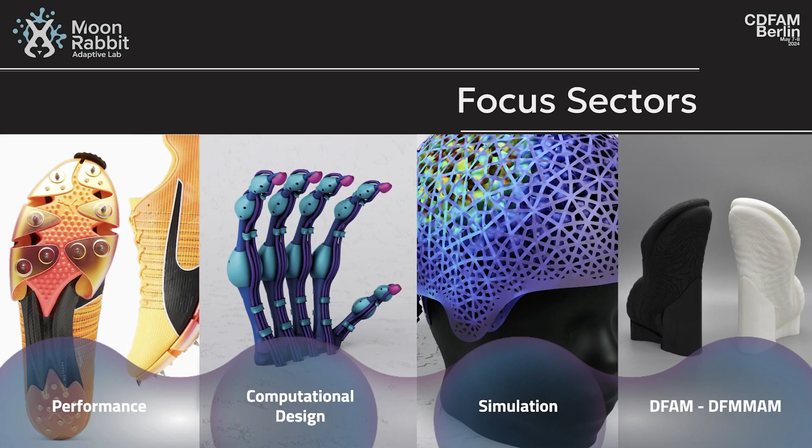We assist companies in crafting their unique recipes of solutions to enhance, modernize, and integrate new technologies into the daily design process. We have four focus sectors.

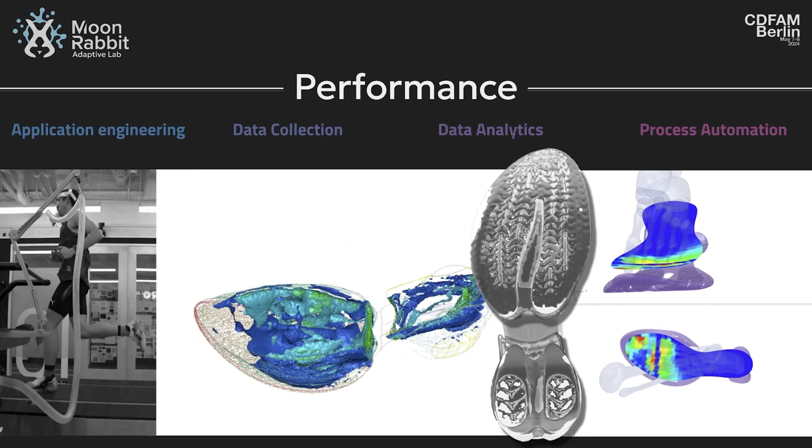Performance product design: here we are focusing on creating the correct KPIs of your designs or processes. We go from data collection, data analytics, we create process automatization, we see how we can apply our skills, our engineering, our knowledge in your products. We pride ourselves on product performance - everything about achieving a target, a specific characteristic, a specific material, specific KPIs. That's the focus of this design part.

Computational design process - this is the part that for us is creative problem solving. We create parametric solutions, custom solutions, or generative solutions based on the creativity of our designers, the creativity of the workflows we are creating, and also the creativity of how we utilize technology, mathematical formulas, and so on to inform our design. We are really proud of this part.

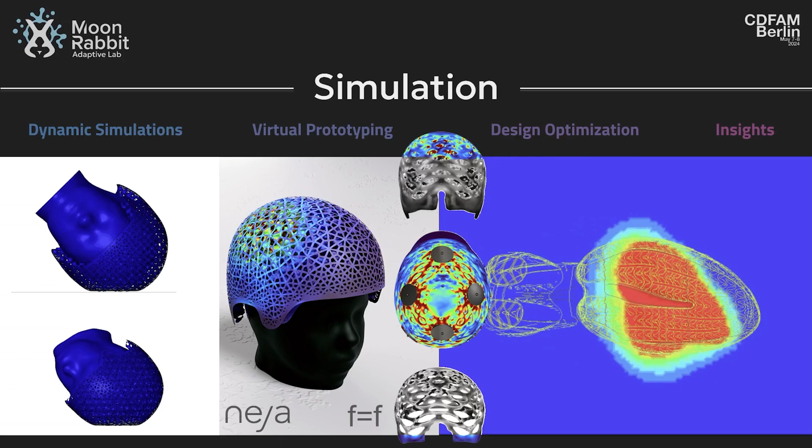We are focusing on creating strong knowledge in simulations, either digital implicit simulation or explicit simulations. We try to focus on creating the best possible material setup and settings in order to help companies create virtual optimization, virtual prototyping, to generate the best insights possible.

Finally, all these areas are converging in design for additive manufacturing, because we know the sector is evolving. This evolution will also be an evolution in terms of manufacturing, and something we believe will be great and will increase is the part of additive manufacturing.

Well, after saying all this, why design systems? Design is rapidly evolving, becoming more complex. We need to see it from a different approach in order to solve the problems of today. This starts to engage different kinds of collaborations - we need to create cross-functional teams in order to create a more complex solution, because complex problems require complex solutions.

If we have different minds with different perspectives, that's the best way to approach it. Computational design is also good at this - it helps us create computational thinking, which helps in breaking down systems into manageable parts and then discretizing into algorithms to enhance efficiency, create scalability and adaptability. That's why we like to solve these kinds of problems.

That's why we are bringing today two study cases of two collaborations created over the last 2 to 3 years. The first is an ETH collaboration with Thomas Buchner, a PhD candidate at ETH Zurich, in which the objective was to create a soft robotic hand using Inkbit technology with vision control. The objective was to produce something similar to a human hand, to show that it's possible with multi-material 3D printing to achieve something as functional and complex as a human hand.

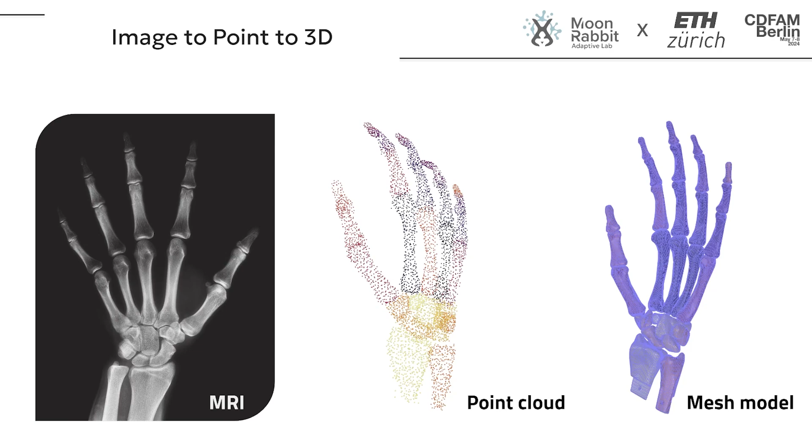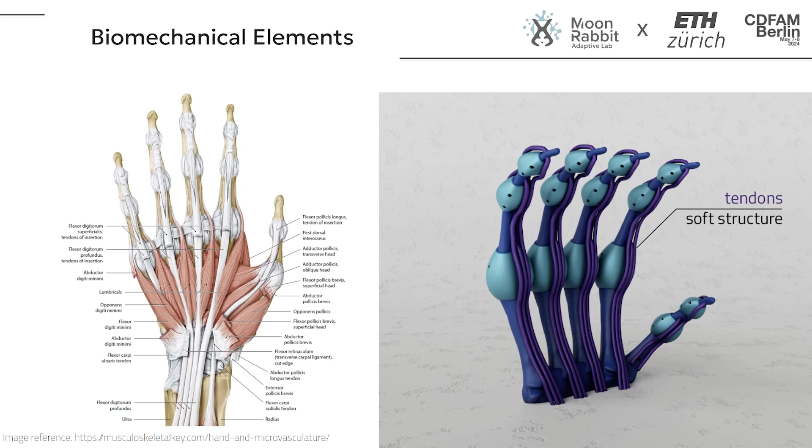We started from the image point, we created the mesh model, and once we have this initial mesh model, we needed to start identifying the characteristics of the human hand. We needed to understand the ligaments, the bones, how the bones are bending, if they're flat bending, the tendons, the pulleys, everything that could be used to create a functional element.

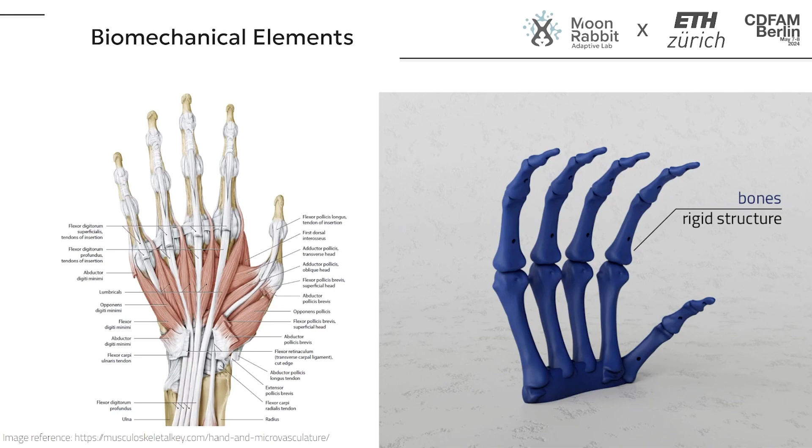Once we identified all of these elements that are actually there, we chose 5 of them and tried to create an intricate model with all of them. We also needed to consider the manufacturing part, so we asked Inkbit, and they told us what to do, what not to do, how to create the interfaces between the soft and the rigid, how they do the gradient materials, how they need to blend together.

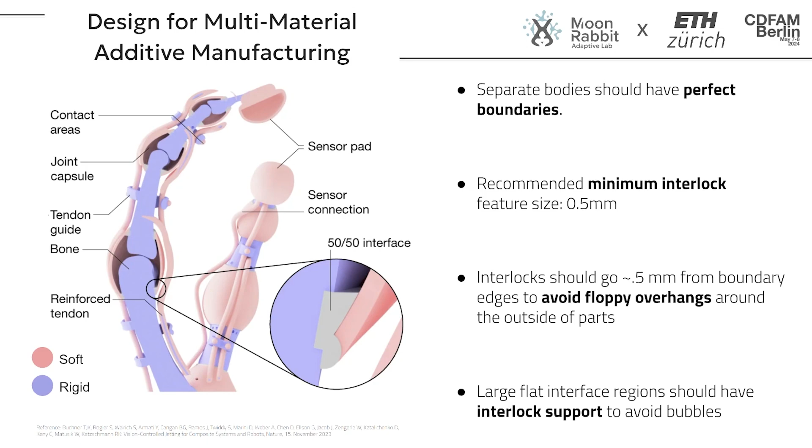Remember, this is a human hand model, so the scale was small. We needed to follow all this functionality at human hand scale with this material, with minimum design requirements, and we needed to create the best of it.

So how do we approach the challenge? The first part was creating a 3D model. We started with a traditional approach: we took Rhino, placed our bones, and started creating on top of that. What was the problem with doing something like this?

Basically, once we finished the first finger, because we needed to check if it was possible to create something this complex, we understood that maybe we needed to move the pulley a little, maybe change the belly, change something. And this change was affecting something else. So at the end we created different options, and we saw that if we needed to change something, something else was moving. It was impossible to follow up all these design changes in a fast way, because of course the timeline was tight.

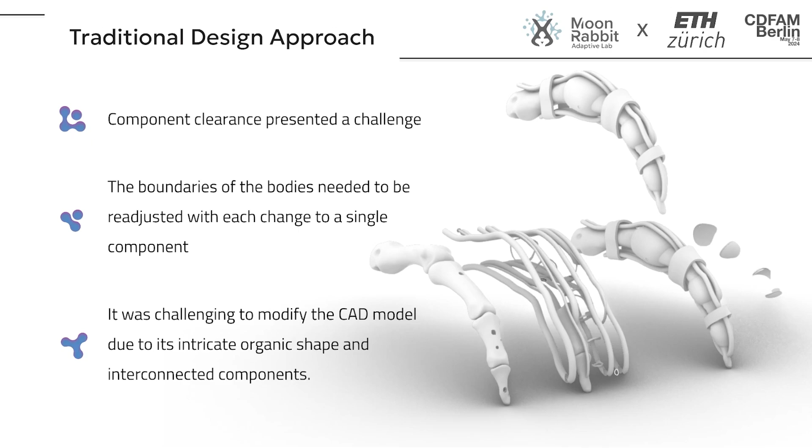So we said, okay, let's remove everything and start from scratch. Let's identify what's the minimum characteristic element that can actually inform our design. We understood that the capsule was the element that was ruling all of them.

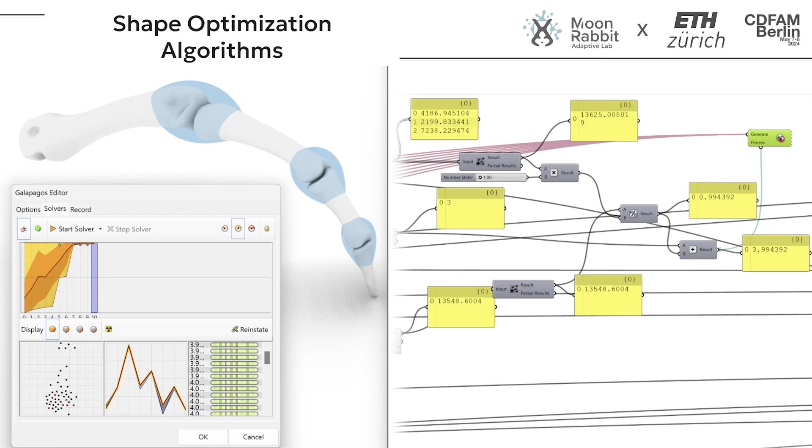Once we identified this one, we created a shape optimization algorithm in order to create the best fitting of the pulley, because we wanted to minimize the volume but didn't want any clash between the components. So doing this, the best way was to create a shape optimization algorithm. We created the pulley and so on.

After that, we started building on top of this element, because by building on top of the element, we knew we were able to parameterize the thickness between the soft and the rigid, between the pulley, between the tendons, between all the ligaments. In this way, we have a more complex design based on a single structure.

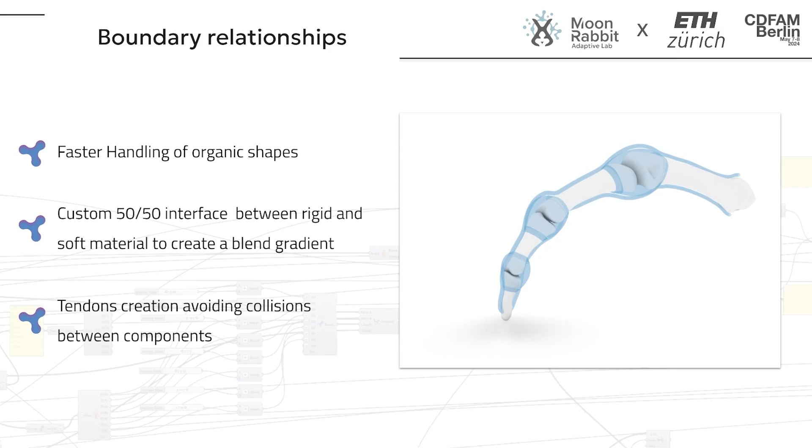So what we did was identify that single structure, and then create the model on top of this. After 8 iterations, we reached the final result in which we have a model complex enough to create, modify, and so on, and then you have some adaptability, so it can be adaptable.

We need to rerun some parts, but of course there are some manual processes like the draining holes, the sensor pads and so on. But at the end, the base model was created in a parametric way using these tools.

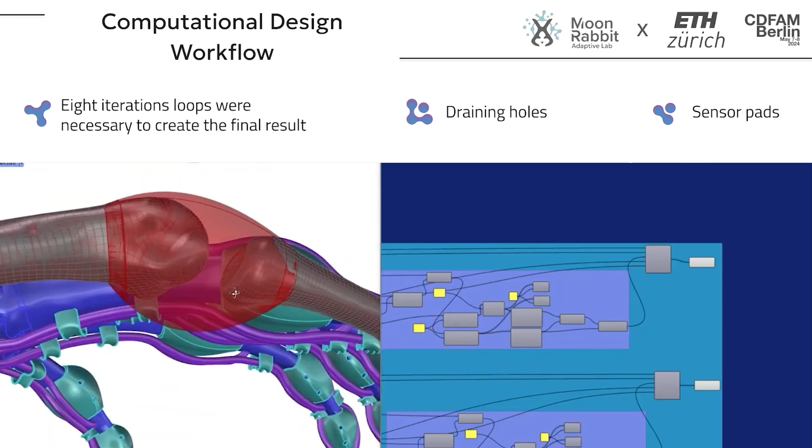After this, I decided, what if computational design was today? So I took this challenge a little further and created a simulation with all these multi-material setups. I wanted to highlight that from 2013 to 2024, it's changed a lot in the computational field. Now, for example, we have the meshless simulations by Intact Solutions, in which we can have multi-materials with faster iterations, and this helps us create informed designs.

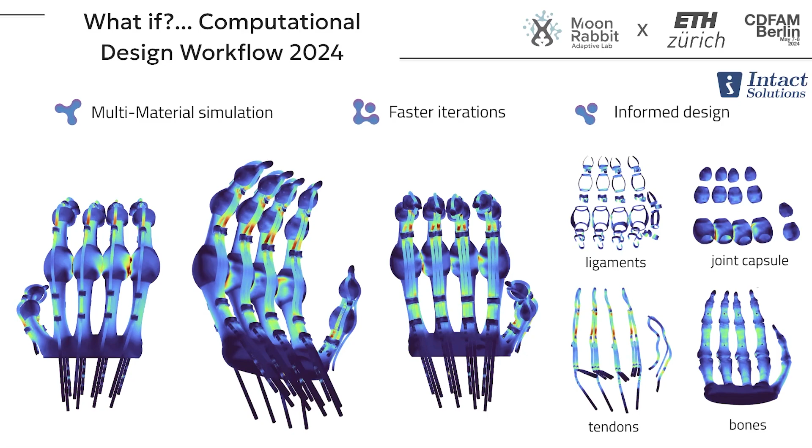So we know that maybe something is going to fail, something is not going to be correct, the ligaments are not well designed, and so on. So we can improve our designs, improve our boundaries, improve the resistance, and use it to create better informed decisions.

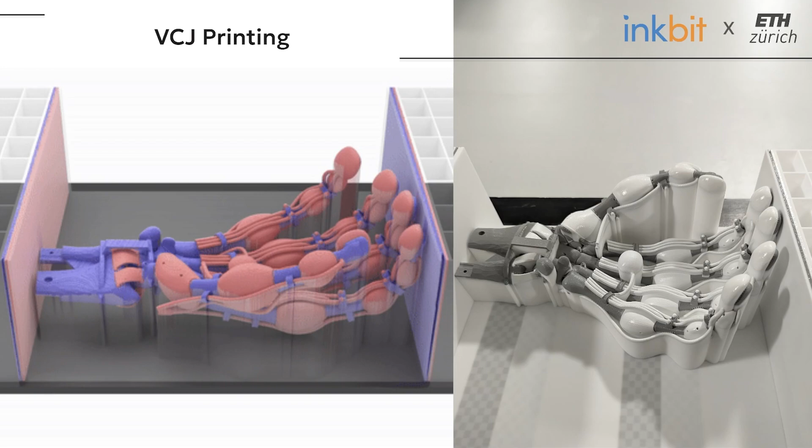This is how it looks. VCJ printing is actually a BMP, a PNG, or like a bitmap image in which you have grading colors in grayscale, so you can select the different materials and so on. And this is the final result, in which we can actually see the soft robotic hand moving.

And after adding on the mechatronic parallel actuators, that was included by two of us.

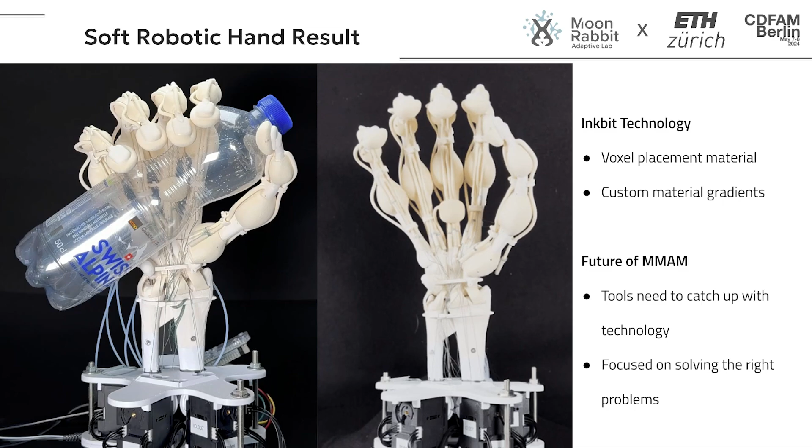Our second case study is about performance product design, because what could be best in terms of performance, as a sprint spike, of course. This is a project collaboration with Puma Innovation, with the Puma Nitro Lab team, Carsten Wolfram, and Coach Liv. So what we did here was take the challenge of how we can get a performance footwear product using computational design, computational workflows.

So we need to understand what the computational simulation has, what's the biomechanical information, what are the materials necessary to create all of these environments and push it into a product that can be informed using these new tools. In order to do that, we need to create a workflow.

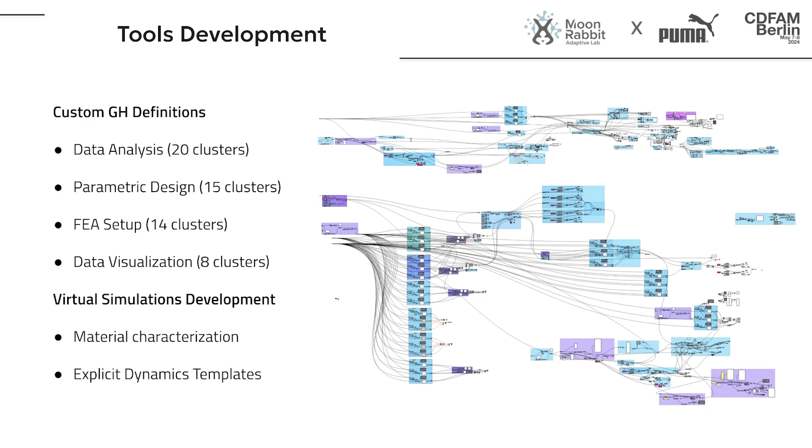We create specific tools, for example, to create data analysis, parametric design definitions, finite element setups, and data visualizations. We use all of this to create templates. Once we identify the minimum requirement, we create templates, the characteristic elements that we can reuse to analyze several data.

This data needs to come from somewhere, so we started creating experimental data collection provided by the Puma Innovation team. We analyzed how Karsten moves, created data discretization and segmentation, and different visuals of this data to understand what was moving and where. This enabled us to create...

Once we created this, we also need to understand what materials are involved in this environment - the upper, the carbon plate, the midsole, the power plate, and the spikes. We also have the track, which is a hyperelastic material, so we create the characterization of this material and try to put everything together inside a virtual environment.

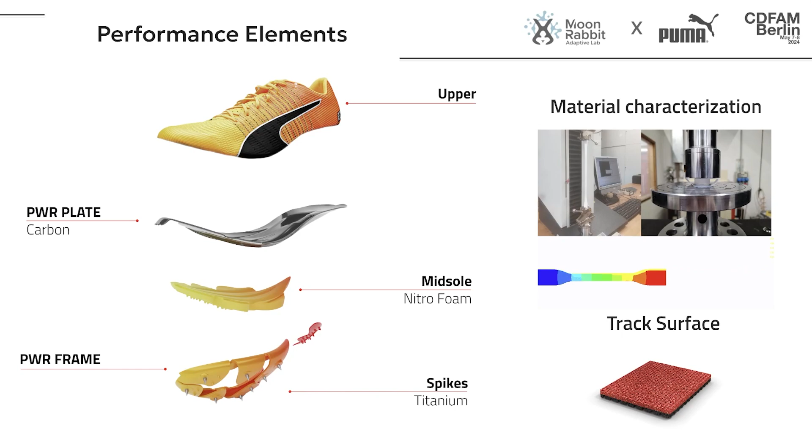What else do we need? We need to create engineering digital models in order to simulate at a degree that is biomechanically relevant. So we create engineered digital models of these different platforms. This is one of the first results after several hundreds of simulations, setups, time spent, readings, and learnings.

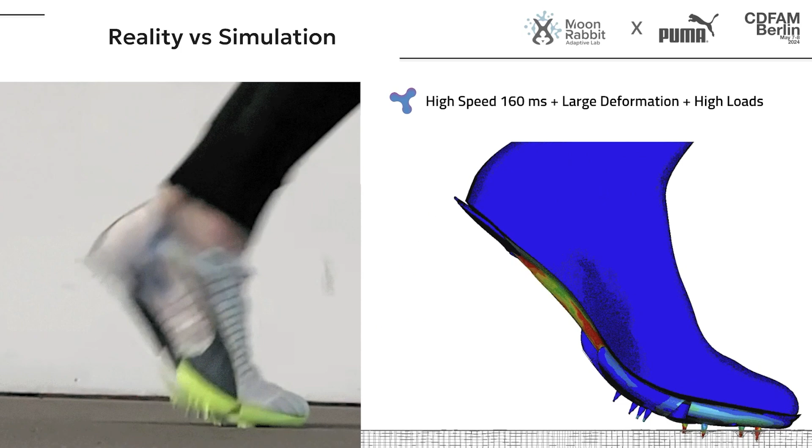So we have this simulation, high speed, 160 milliseconds, large deformations, high load, so we can identify critical areas, positionings, carbon plate direction, torsion, and so on. This helps us to inform our designs.

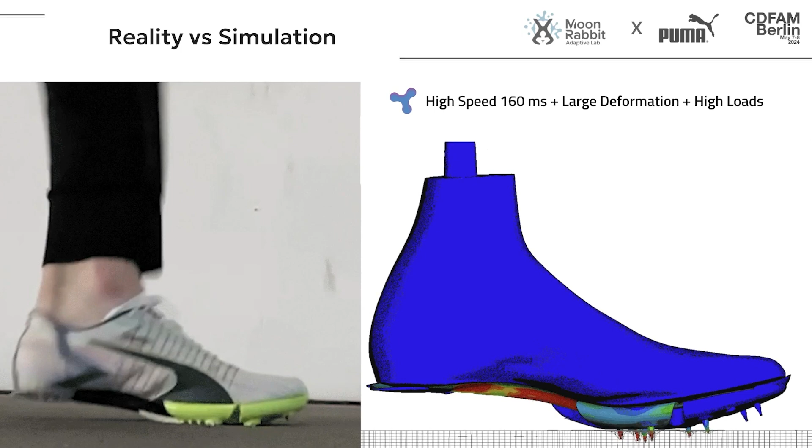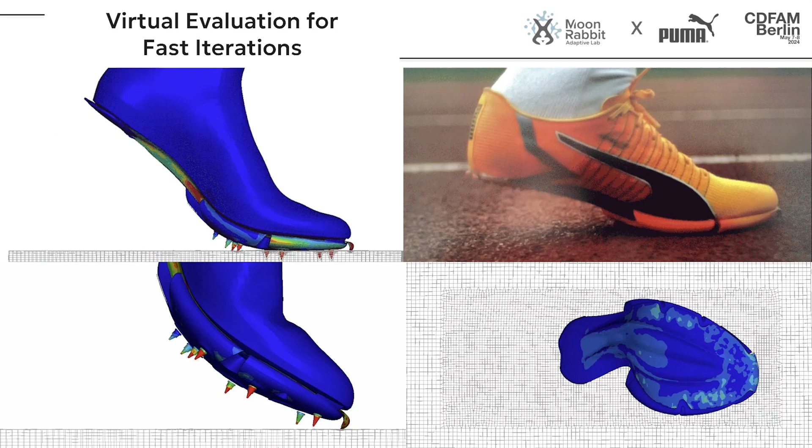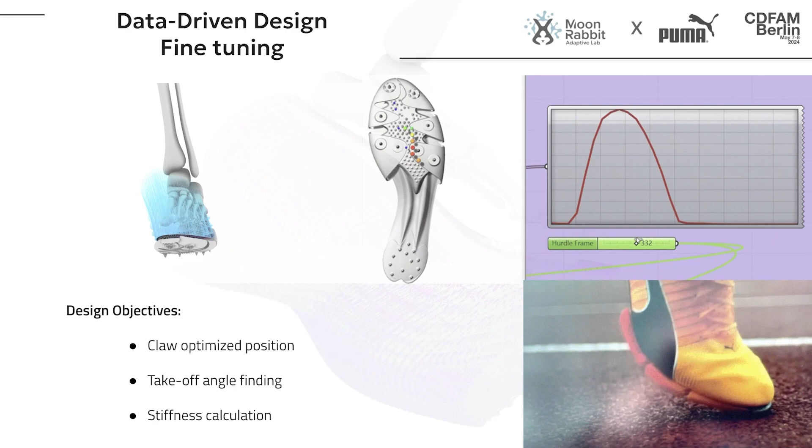This also helps us interact between digital and physical products, so we use these simulations to iterate and create features - for example, the claw in the custom shoe. We use this simulation to identify the correct position, the takeoff angle. We use this data to inform our design, calculate the stiffness, the directions, and so on.

At the end, we wanted to highlight that creating virtual prototyping using data-driven design workflows helps reduce the physical sampling, which is good for companies. Of course, we need really good material characterization because the quality of your outputs is as good as the quality of your inputs.

We need to do model validations to understand how far off we are between digital and physical, and what needs to be improved, because this is an iterative process - a process that is always evolving.

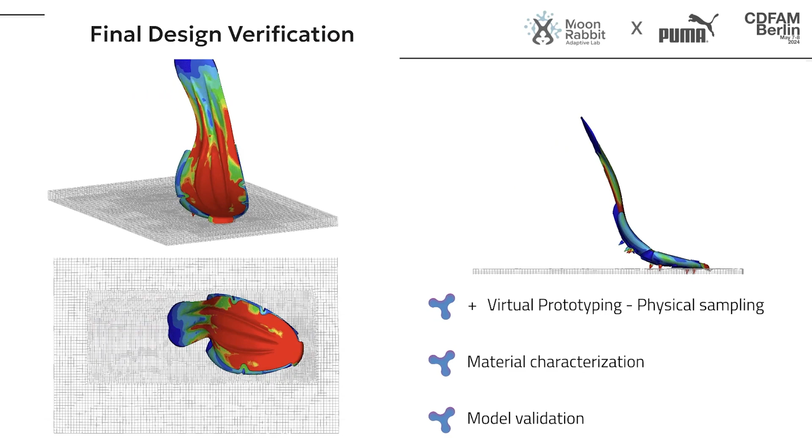What's the result? Of course, he won the world championship, but everything is part of the athlete's performance. We believe we helped him with that extra milliseconds to achieve his goals - by giving this extra push with the claw, with the specific stiffness and performance setting, we contributed to his winning.

What are our takeaways from these design tool developments? It's important that as design evolves and becomes more complex, we create tools that are repeatable and have a specific thinking behind them. We knew virtual prototyping is complex, but it's something we need to push because virtual prototyping is not reality, but it can be close - we just need to use the correct methods and material characterizations to create really good informed decisions.

Data visualization is crucial - one of the most important aspects of your design, because you could have a really good design, but you need to show it, you need to express it to a big audience. And of course, computational design is a continuous learning field.